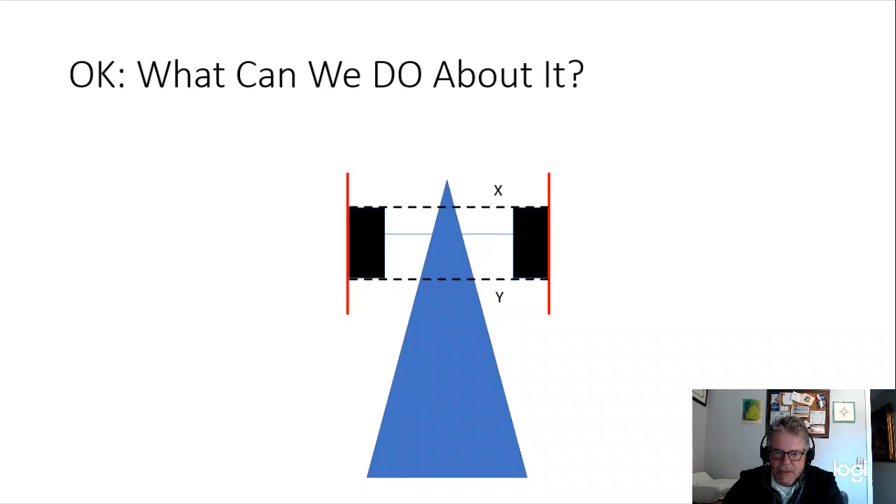Here's how you measure it. And it's relatively simple. I try not to get too cosmic. The thin blue line here is the center of your axle. And I know it's not a perfect drawing. So what you do to measure your toe is a straight edge of some sort. Maybe a pair of rulers, 2x4s. You want them to be straight, perfectly straight, and you lean them up against the edge of the tire. Right? Then you take a measurement X and a measurement Y, and you compare those two.

So let's say X is greater than Y. That means the front measurement is greater than the rear measurement. That means you're toed out. Again, we know toe out, toe in, bad because it increases rolling resistance. So conversely, if X is shorter, now you've got toe in. If they're the same, then you've got zero toe, which is 99.9% what you're looking for. And I will go into a little more detail here in just a second.

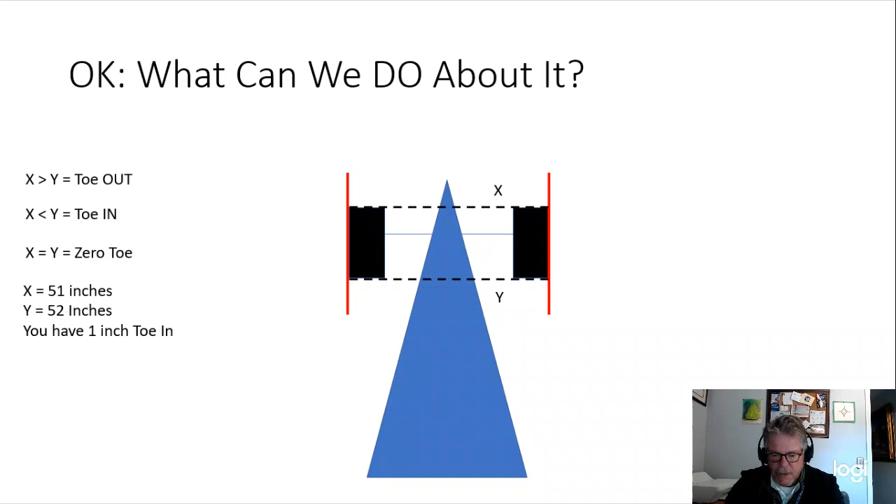So let's do an example. Let's say you measure your car and it's 51 in the front, 52 in the back. That means you have 1 inch of toe in. When you do this, I suggest you get a clipboard, a piece of paper, something to write these down. And I actually, when I do my race car, I draw a picture and I put an arrow, direction of travel, because you measure the two and all of a sudden you go, okay, which was which? And now you're adjusting and you may end up making it worse.

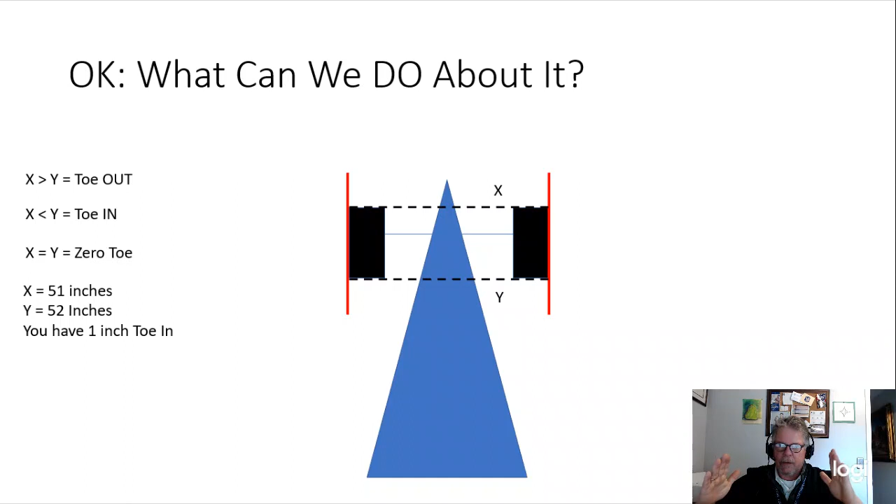That is your steering arms, those threaded rods. And just as an aside, I know one of the teams, Apison, looked up and was able to get for relatively cheap a rod that's actually threaded differently on either end. So you turn the rod and it pushes the wheels in and out. I'll get more into detail on that. What you have right now is not that. But we Greenpower folks are looking at getting that for all the teams.

So now what? I need to either lengthen or shorten the steering rods, to either pull or push the back edge, because the steering rods are behind the pivot points for the axle, your steering arms. So I shorten or lengthen those, and that's going to change the angle of the front wheels. And you want to do it about the same on both sides.

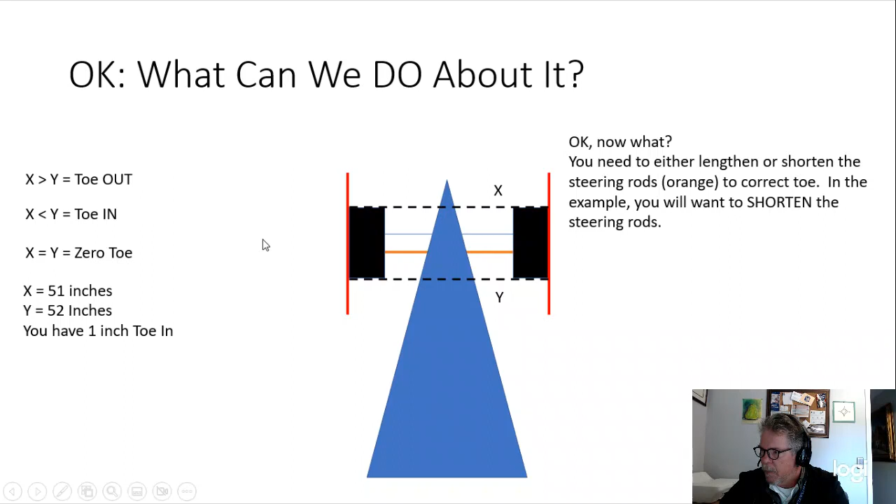So let's go back to the example. Because we have toe in, i.e. the front edges of the tires are pointing inward, we want to shorten the steering rod. So if we shorten up that orange rod, we're going to pull the back edge of the tire toward the body of the car. Okay? And again, drawing a picture of this while you're doing it can help. By changing the lengths, you change the settings on your front wheels. You're moving the back edge of the tire either inward or outward, depending on what you need.

So here's a quiz. Don't you love quizzes? No, nobody does.

Oops, wrong click. Lengthen the steering rods. That's going to push the back edge of the tire on both sides away from the body and get the tires pointing down the racetrack. And so the next one's easy, right? What do we do to fix that toe in? We shorten those rods and pull the back edge of the tire toward the body of the car. Okay, well, how do we do that?

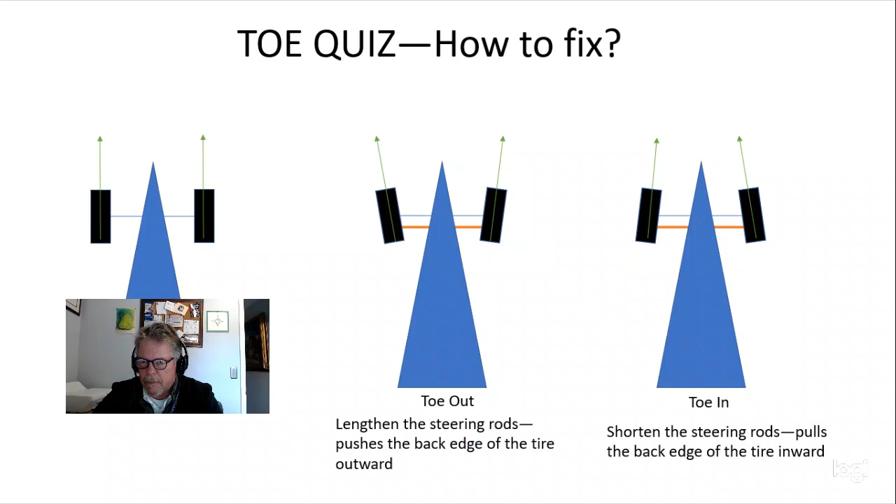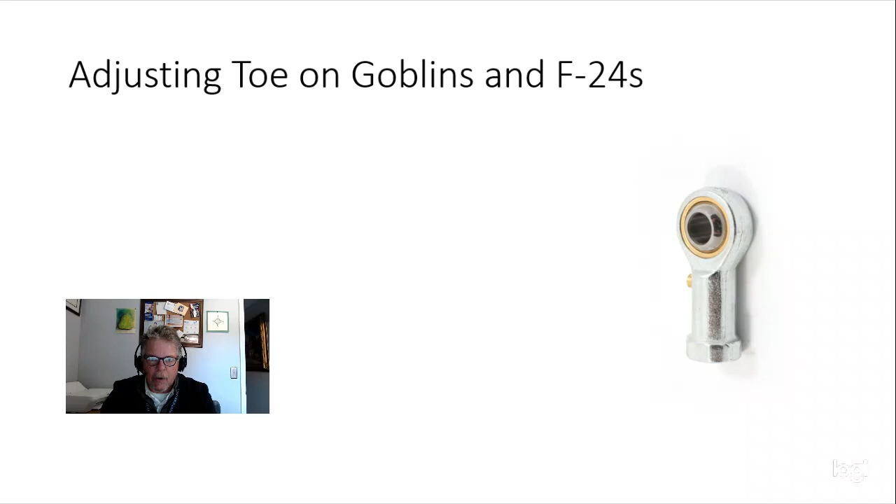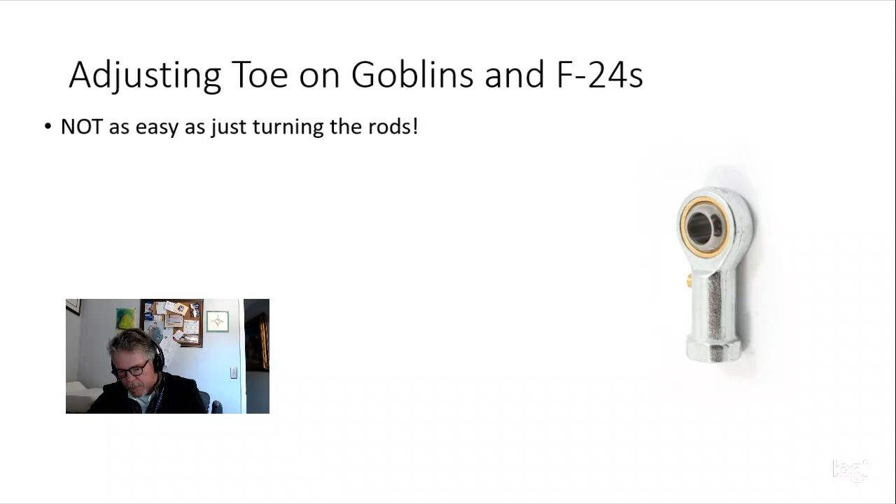Right now, with the threaded rods that come with the kit, they're just threaded from one end to the other. So if you put a nut on there and spin it, it'll just go from one end and eventually fall off the other end. So if you turn that rod, it's moving out of one of the rod ends, that's what the picture is, and into the other. So you're not changing the length of the steering arms at all. So what you have to do is do them individually. That's why I built this one. It's not as easy as just turning the rods. Eventually one's going to be fully into the rod end and the other one will probably be falling off. So it doesn't do anything.

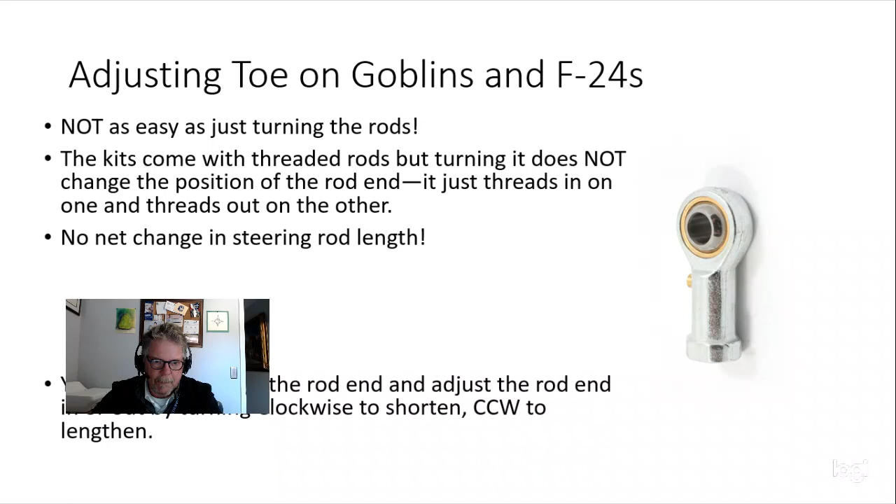So what you have to do is actually take the steering apart a little bit, get those rod ends loose, loosen up the jam nuts on them, and physically turn the rod ends either in or out based on whether we need to lengthen or shorten the steering rods. So that's what this is all about. If you just sit and turn the rod on the car, doesn't matter, F24 or Goblin, you're not going to change the length of that steering rod. Okay. Yep, in the way.

And this can be a little bit fiddly. So you disconnect the rod end, and the easiest one to disconnect is the one out by the wheel itself, where it hooks into the steering arm. Disconnect that, drop it down, and once I loosen the little jam nut, I can turn the rod end clockwise or counterclockwise and move it either in or out depending on what I need to do. So disconnect the rod end, adjust the rod end by turning it clockwise to shorten, you're threading it onto the rod, or counterclockwise to lengthen. Give it one turn on both sides. Then put it back together, remeasure.

And that'll give you an idea as to, okay, one complete turn, so half, one. And I actually count them out myself. That changed our toe by 1/4 inch, and we need to change it by 1/2. So I need to do another turn. And it may take 5 or 6 times to get it just right. It is a little bit fiddly, but the results are dramatic.

Again, rolling resistance is really one of the keys to going quickly in a Green Prix car. Okay? Once you finally get the measurements done and you're happy with where your toe is, don't forget to re-snug those jam nuts. They just help make sure nothing comes loose. But you can leave those loose while you're doing these adjustments. No need to snug those back up. Snug everything back up once you get it where you want it, and your car will be ready to go.

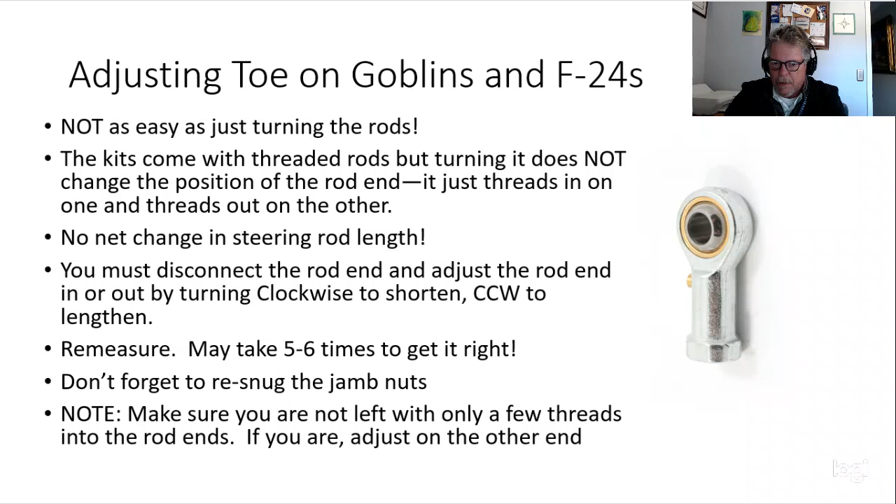Okay? If you're falling off the end of the rod end, now you're going to have to adjust the other end. And it's not hugely difficult. It's just, like on the Goblins, both of the rod ends are bolted together. So I'm probably making this more complicated than I should.

So maybe if you want to really fiddle with this, you may want maybe an 1/8 inch of toe in. I'm not going to give you an exact number that's perfect to make your car super fast, but that would be something to play with on a test and tune. See how it feels driving wise, and if it doesn't increase your speed or decrease your lap time just a little bit. Okay, just a little food for thought.

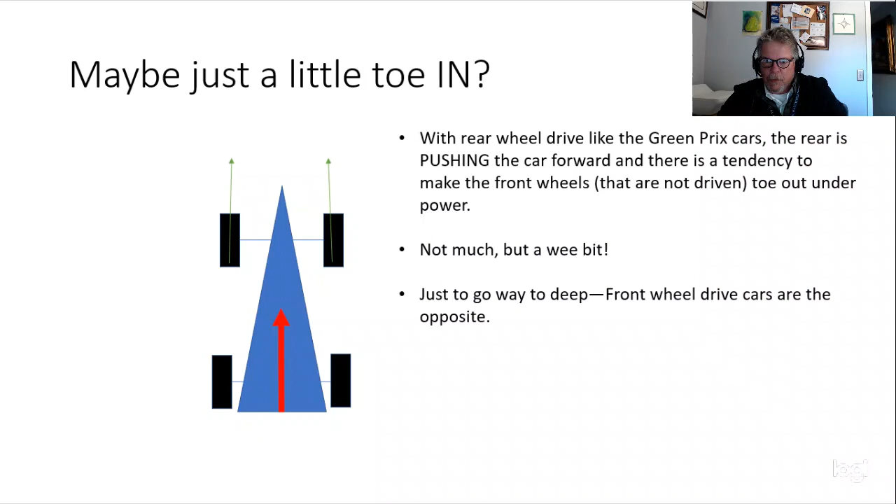Here's one more, just to confuse everybody. Okay, so not much, a wee bit, because we're talking Scottish now. When you get out of Green Prix, let's say your first car is like a Honda front-wheel drive. Front-wheel drive cars are the opposite. And again, this is just food for thought. But because the thrust now is coming from the front tires pulling the car, typically a front-wheel drive car will have just a little bit of toe out, because as the wheels start to pull the car, they naturally do this and generate a little bit of movement. Okay, so like on my old Mini Cooper front-wheel drive, I've got an 1/8 inch of toe out, so that now when the car is under power and pulling forward, that goes to 0.

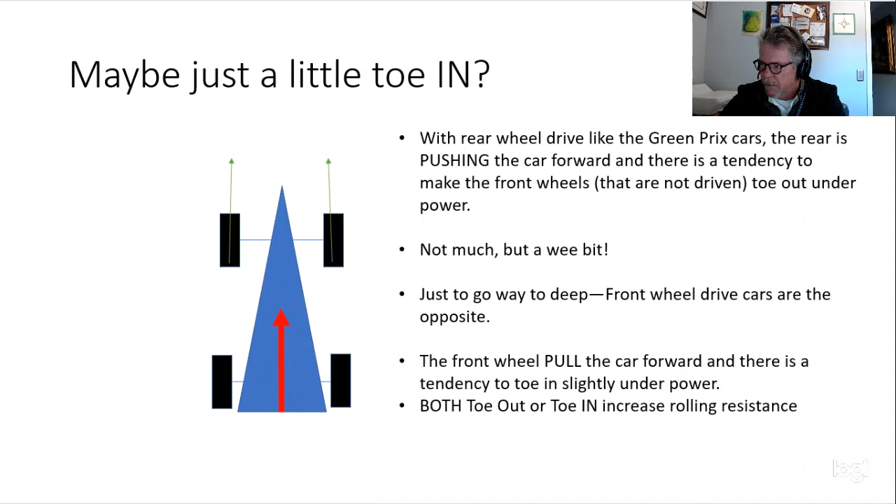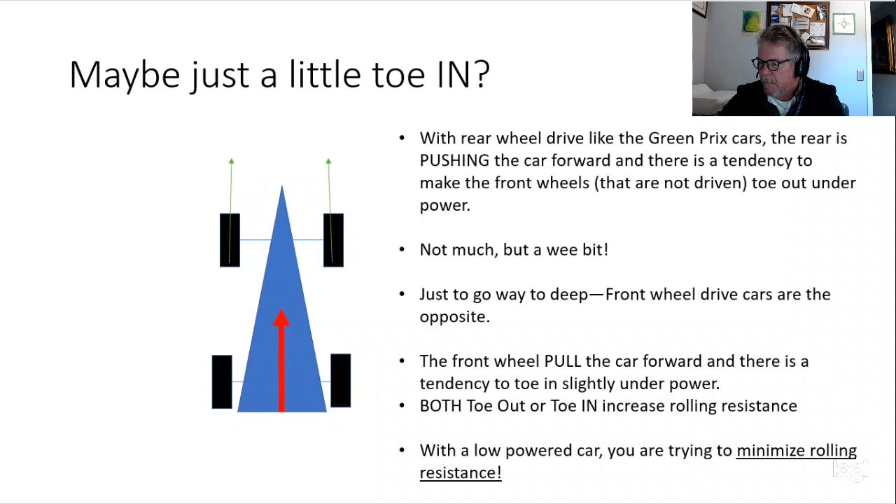Okay, I'm not going to go beyond that. There are some advantages, disadvantages when you get into racing about toe. But really what we're looking for here is minimum rolling resistance, okay? And remember, both toe in and toe out increase rolling resistance. You want the car using minimum amperage, minimum power to roll straight. I think I've said that enough.

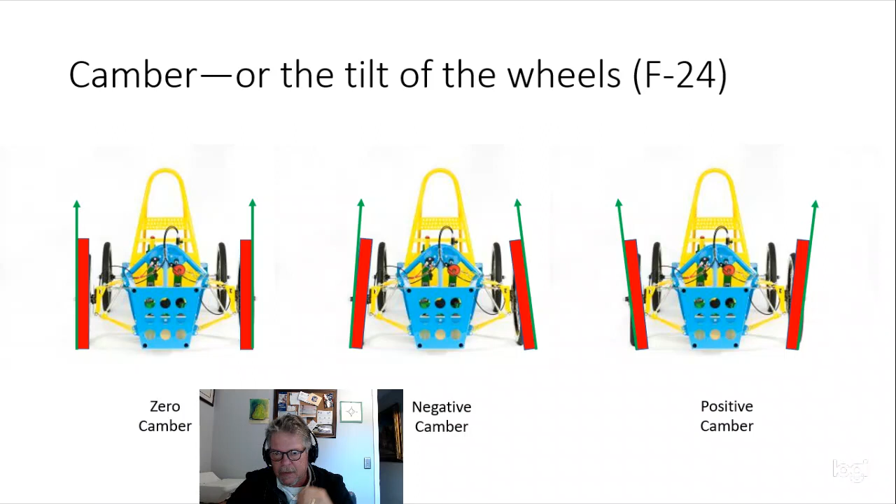Negative camber, you can see it here, and I've exaggerated it a bit, but the tops of the wheels are actually tilted in just a little bit. Okay? And then positive camber, the opposite. And the F-24s do have a little bit of adjustment here. Now again, the perfect setup, I don't know. 0 camber is probably a very good place to start, and maybe a touch of negative. Positive camber generally is not a good thing on any kind of automotive device. Right?

To fix it, that's the other piece. Okay, great. What can I do about it? What you do on an F-24 is you either lengthen the upper or shorten the lower A-arm. And that's sort of a misnomer, but the A-arms are these pieces that come off of the body itself and go out to your steering lug, your steering arms. Right, and those two. And you can imagine if I shorten this bottom one, it's going to pull the lower edge of the tire in and get me more towards 0 camber. And of course the opposite then for the other side.

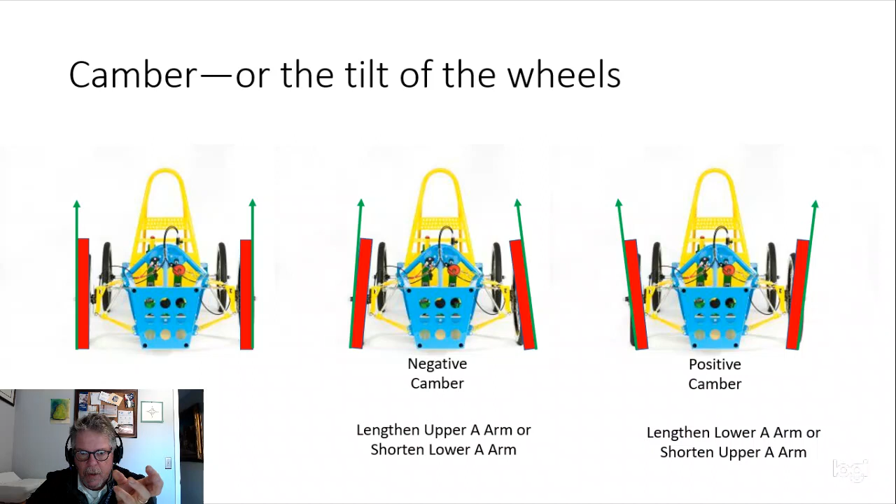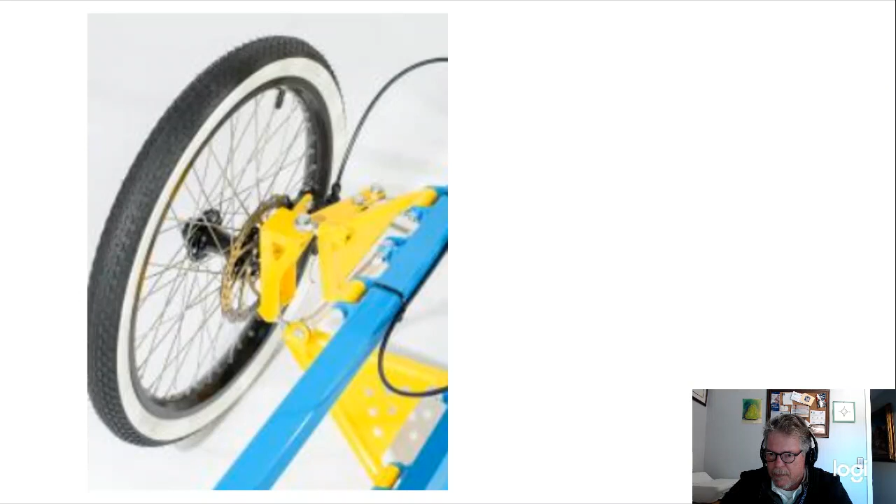You would lengthen the lower or shorten the upper, or a combination of the two, maybe what you need to do to try to get yourself back toward that 0 camber setting, if that's what you want. And here's, it's not the greatest picture, but it was about the best one I could find on the internet. This is looking at an F-24. This would be your upper A-arm here, lower A-arm here. They're solid pieces, but you can see they do look sort of like the letter A. And so you have that threaded rod end that connects to your steering arm. And you can see by shortening and lengthening those two in combination, or maybe just one side, you can affect the tilt, the camber of your tires.

Right? If you see that the car's wearing out the inside edge of the tires, you may have too much negative camber. So the car is riding on that inner edge. Right? These things don't have a great contact patch. The tires are skinny and hard, but you still want to maximize your grip in the corners. Okay? And now let me go a little deeper on that as well. So that's just what I've said. Extend the upper, shorten the lower. It just changes the tilt. And to me, this one's a little more intuitive. I would still write down my adjustments.

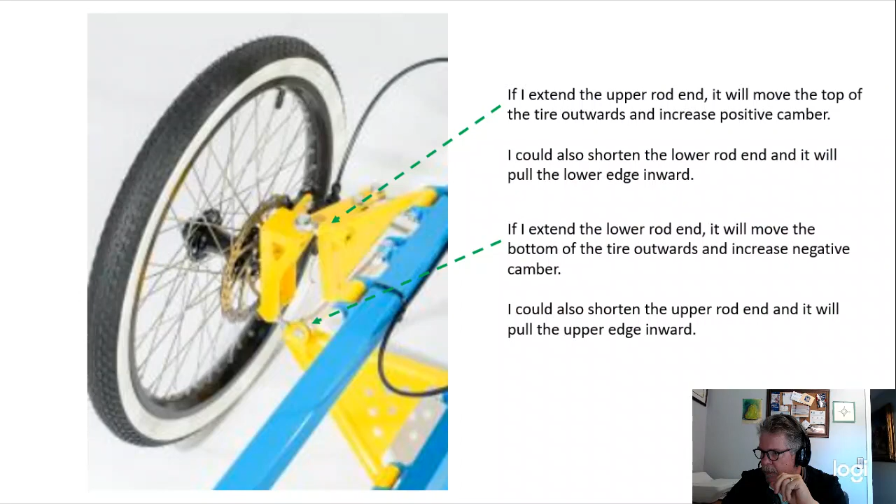And to check camber, you can just set a level against the edge of the wheel, make it, top and bottom in the same place. And they actually do sell what are known as camber gauges, but those get kind of pricey. And that can help you measure the tilt of your front tires. Camber to me is pretty easy to see just by eyeballing the tire itself. But use a bubble level to help you with that. Okay, so why would I want a little negative camber? You might not. I'm not trying to set the cars up for you, but you may.

And so here's a picture of my hot rod, and this is down at Sebring a few years ago. So I'm racing at Sebring, and I drew the picture. I tilted it to make the car flat, and notice what's happening. This is a fairly high-speed left-hand corner, and if you look at the outside, the right side tires, they're actually tilted over into positive camber. The inside, the left side tires with the red arrow, are in negative camber. But what I don't really care about is that inside tire. It's not doing a lot of work.

The outside, the green arrow, all of that weight transfer, and if you don't understand that, go back to the Green Prix Racing Basics link down there at the bottom. The car in a left-hand turn is transferring most of its weight over to those two right side tires, front and rear. They're doing almost all the work of making the car turn and go fast through the corner. So I looked at that picture. What do you notice about the front wheels? I've got positive camber. That means the tire's not perfectly in contact with the racing surface. Okay? So when I saw that, I was like, geez, I'm losing a little bit of grip there.

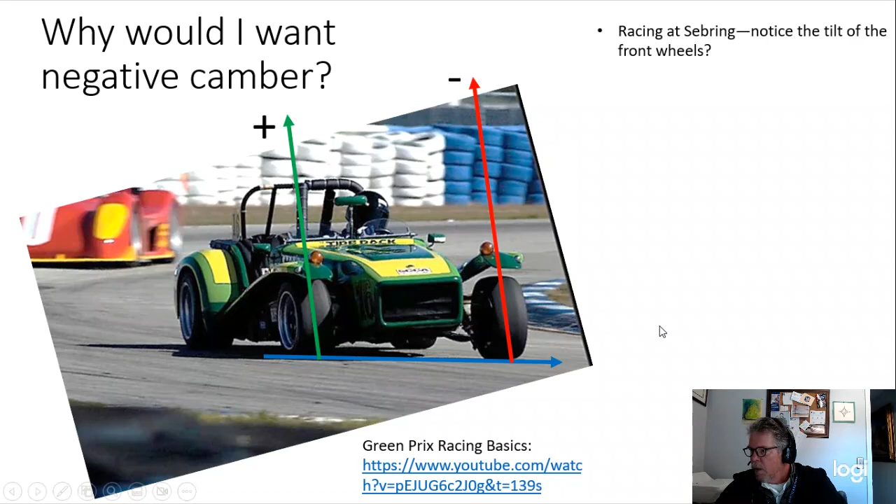So what do you do? Well, you go back and you measure it and you add a little negative camber. I want that green arrow tire flat on the track. This picture, it's a little bit hard to tell, but the inside edge is actually up and away from the track surface, limiting my grip. Okay, so it wasn't perfect.

Solution: increase negative camber on my right side front tire. There's nothing I can do with the rears. It's called a live axle. There's nothing you can do about it. Too much information. And again, I don't really care about the inside as much because it's not doing all that much work. So what I did, I added a little bit of negative camber. I shortened the upper A-arm on this car.

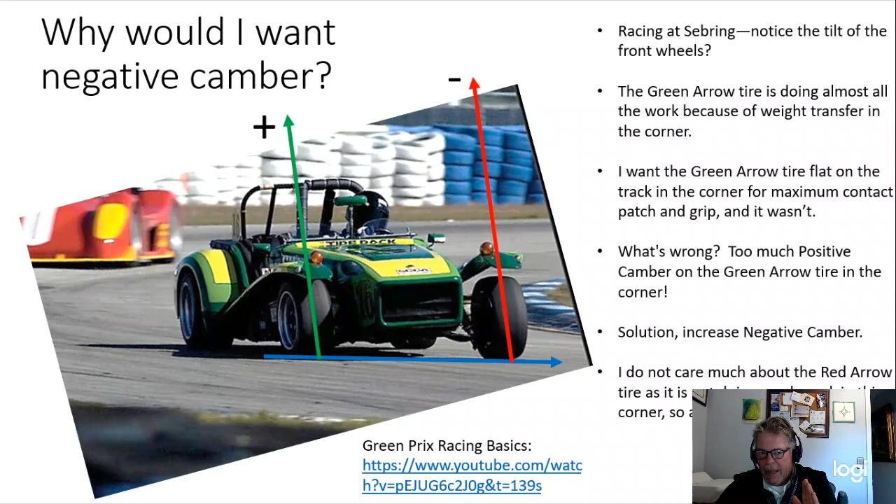And then here's another picture of what it looked like after that adjustment. So this one even shows it more dramatically. This is a very tight corner at one of our hill climbs. And you can see the inside, the left-hand front tire, it's not doing a whole lot of work. And look how much of it's not in contact with the track. But I don't care because I want this one fully in contact.

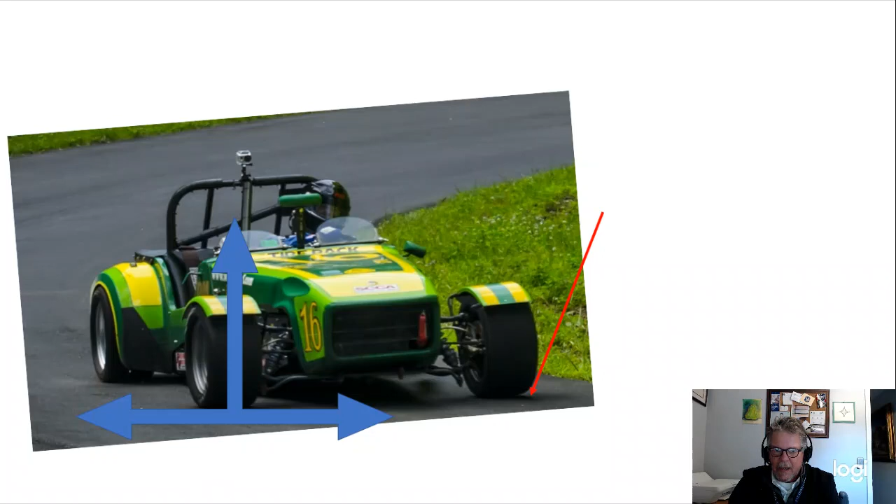So look at this. Now it's flat and it's straight up and down. So I am maximizing how much grip I have with that tire in the corner to make the car go faster through the corner, right? And I think that's pretty much what I've said. So I increased it by about 1.5 degrees. Now the tire's flat on the pavement. That's what I wanted, okay? Faster through the corner.

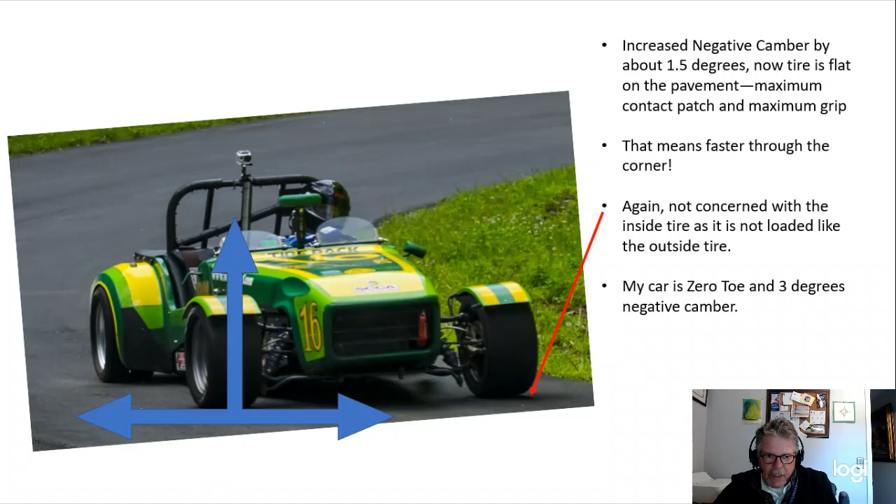Okay, that was it for the tech tips on video or suspension-wise. Let's talk a couple driver tips and then a wiring tip, and we'll call it a day. For the drivers, we've noticed this on the last few, and it's natural, it just happens. Where your eyeballs go is where the car goes. We teach that to new drivers in our street survival as well. So human nature is, if I look over here, I'm going to turn slightly in the direction I'm looking. Okay? Is that bad?

It can be. So if you're looking at the advisor, and I was watching you guys as you went by with the lap counts for the Goblins and then for the pit inside for the F-24s, most all of you did a really good job just driving, getting on the front straightaway, quick glance over, and then back to where you're going. And that's what you want to do, because the natural tendency is to turn toward them. So just be careful about that.

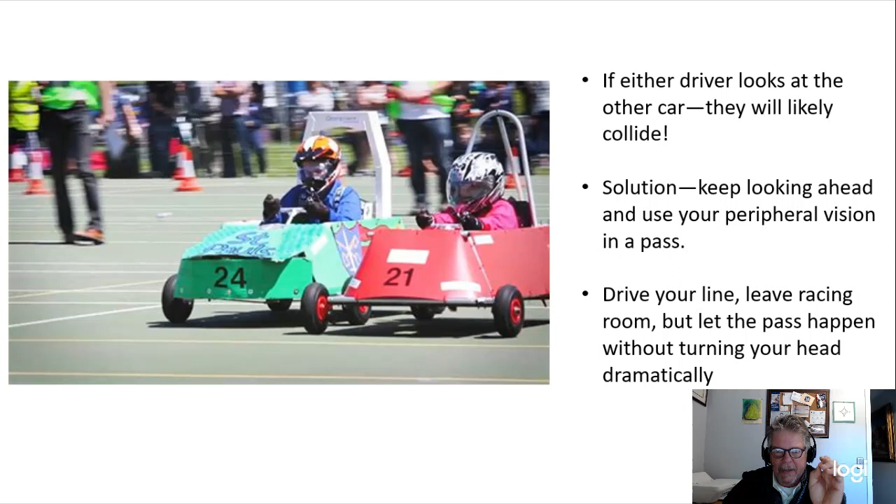Okay? Drive your line, leave racing room, let the pass happen without turning your head dramatically. And that's why on the F-24s we have the rear view mirrors, so you really don't have to move your head much. In fact, a couple of cars had them mounted such that it was in their peripheral vision. They could see clearly ahead, but the setup of the mirrors looked really good to me. Okay. All right. Last one.

This is kind of a team tip, I would say. We had a couple, 3 cars, F-24s, have wiring issues. The terminal ends came loose off of the battery, and thus they had to come in and fix it. Quick fix, yes, but they do come loose. So the terminals where you screw the leads into the batteries, they won't take a lot of torque, so it's hard to really crank them down.

The other thing is, I've noticed on a lot of the kits that the size of the hole is actually way bigger, where it would come up and off of the screw if it wasn't tightened down. And that seems like a bad setup as well. Yes, you can tug it in and tighten it down, but if you start to lose a little bit of that tightness, that's easy for that terminal end to come loose and actually come off the battery.

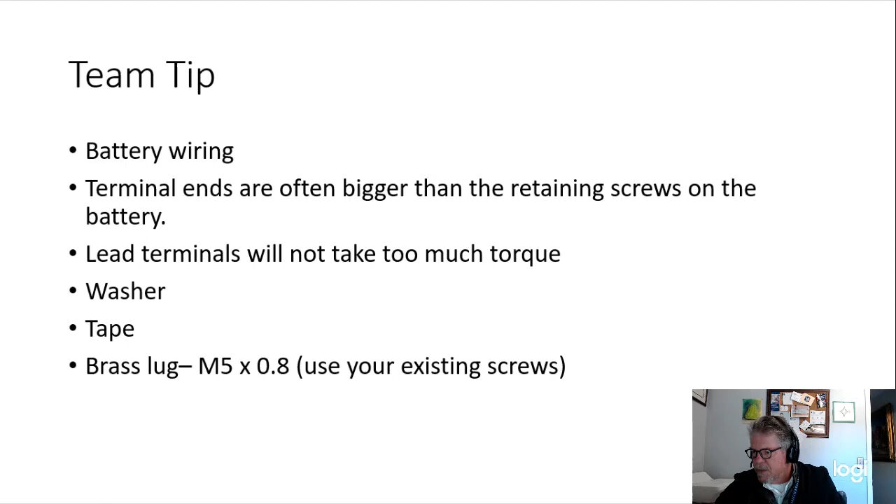So a couple suggestions, you guys can figure out your own way to fix it. Either a washer under the screw that goes into the battery, maybe just screw it down with a washer and then hit a whack of duct tape on top of it to keep it from coming loose. And the other thing I saw, let me end the presentation and show you, on Amazon, this is up to you, I'm not trying to plug any kind of product, but I saw at least one team had these.

The thread for the batteries, the 2 I had in my garage, I just went and looked at them, are M5 by 0.8. It's a metric thread, M5 0.8. You know what? I should have put that on. Did I? Yeah, I did. It's right there. If you go, I don't know what that means. It doesn't matter. It has to do with the size of the screw and the thread of the screw. But if you need something, just go to ACE with those numbers written down, and they can help you out. Right? I need an M5 by 0.8.